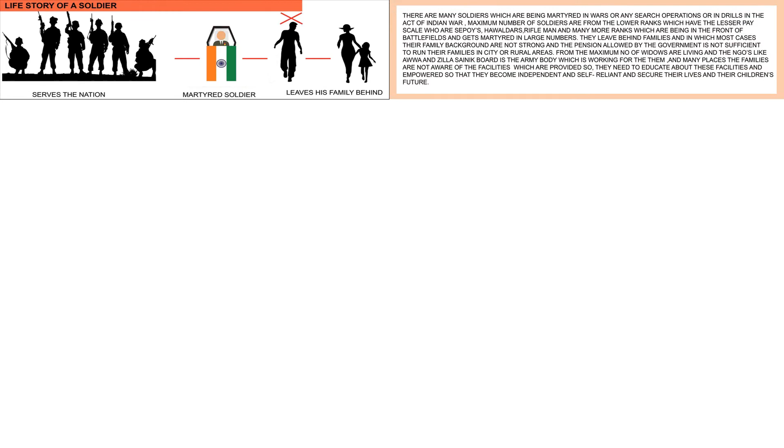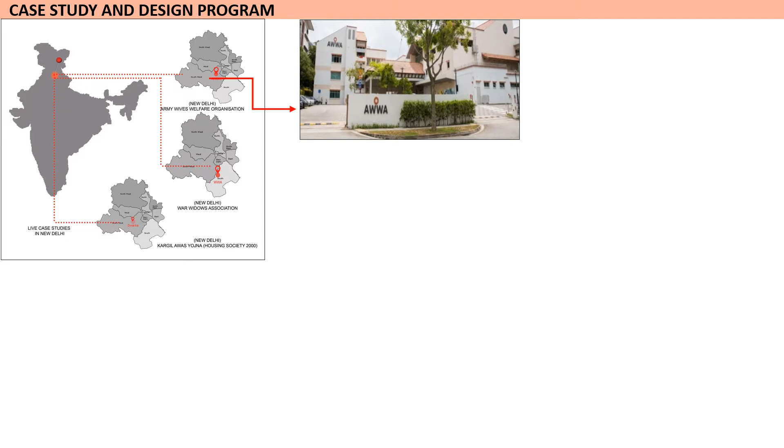The case studies are done in New Delhi. Case study 1: Army Wives Welfare Association, War Widows Association, and the Kargil Awas Yojana Housing Society. While doing the NGO case studies, I came to know about the opportunities they provide to the Veer Naris, but they basically reach only those Veer Naris who are educated, aware of these facilities, and those who have shifted to the cities. They focus less on widows in remote areas, though they keep track of those widows with the help of the Zilla Sainik Board, but provide less help.

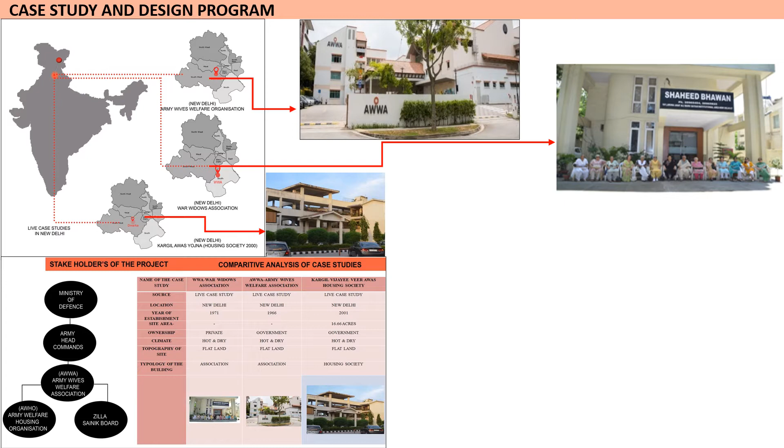With this understanding, I realized that with the help of NGOs, I can propose the necessary facilities within a gated campus that will be easily accessible to Veer Naris from nearby states also.

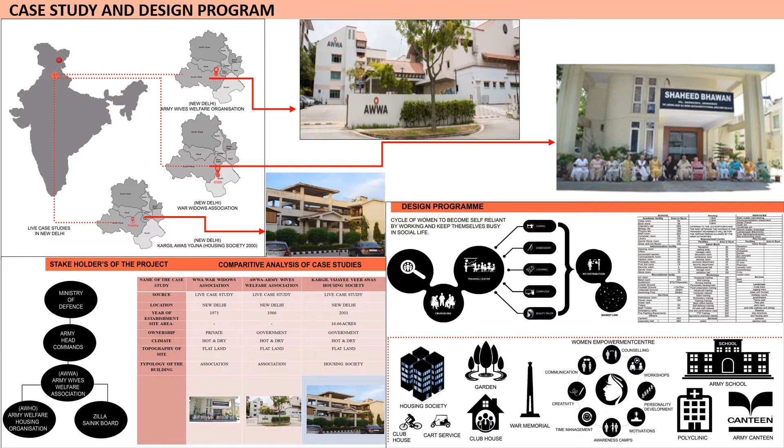The design program includes an Empowerment Center with skill-based training classes for job opportunities to help Veer Naris become self-reliant. A Housing Society, where houses are allotted according to the rank of the soldier. Recreational spaces, landscape garden, clubhouse with organic swimming pool, children's play arena. For health facilities, a polyclinic is provided, along with a school facility for their children, an army canteen for groceries, and a daily market for daily needs.

The reason behind choosing the site in North India is that the borders are in the northern region. North India has the highest contribution to the military forces, and the ratio of casualties is higher from North India, including the northern region area.

This is the proposed site by the Sainik Welfare Organization. The site lies in the city of Gaya, Bihar, located near the army cantonment locality. The site area is 39.71 acres.

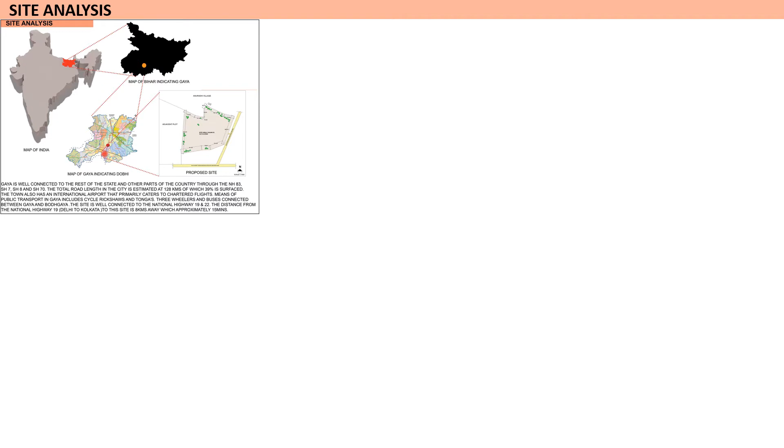Gaya is the city at the center of Bihar state. It is very well connected with Uttar Pradesh, Sikkim, Nepal, West Bengal and other states too. The project also demands a huge expanse of open space, away from city noise and pollution. The town has a tropical hot climate with hot summers and cool winters.

Site surroundings: the site is very well connected with Gaya city, the nearby airport, railway station, bus stand, bazaars, army area, etc. All these facilities are available within the range of 10 to 15 kilometers.

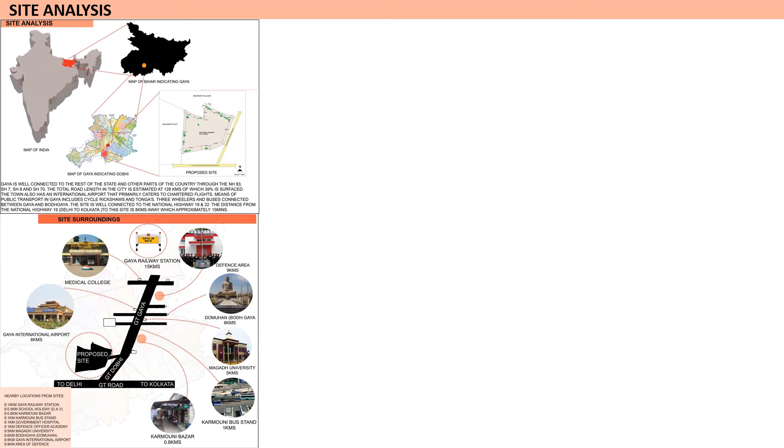The site shows the images, some climate study. The topography of the site is flat land, and the site diagrams show the site area, road hierarchy, site vegetation, site connectivity, built-unbuilt ratio, and the site climate.

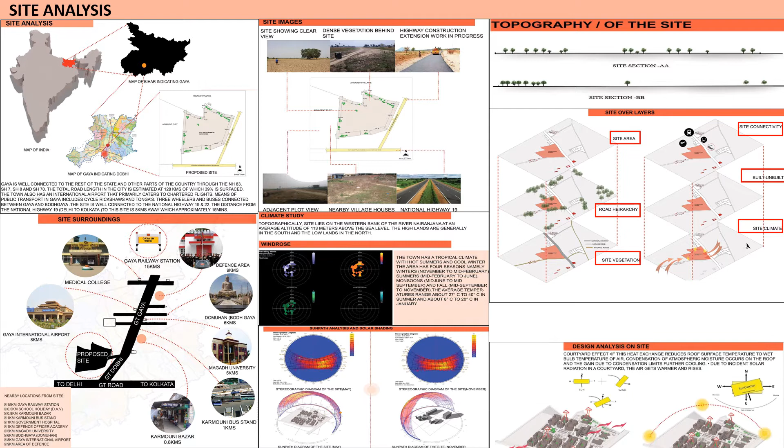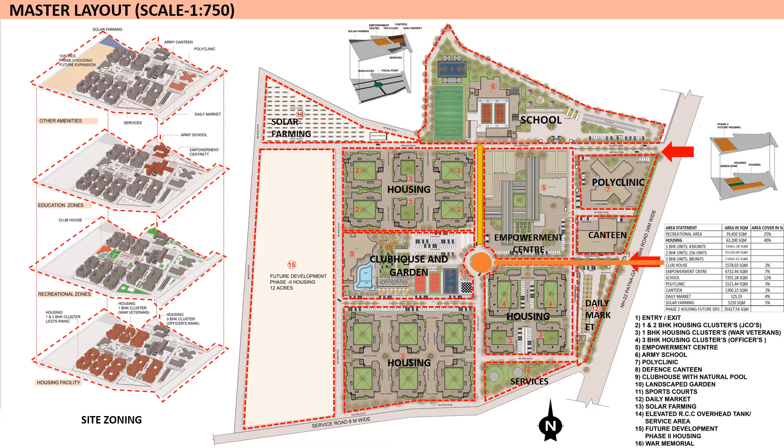Towards the north, the path leads to the army school; towards the south, the housing society; towards west, landscape gardens; and towards east, a 3 BHK housing, polyclinic, and canteen. All these paths are connected with peripheral roads.

This is the NH22 highway, these are the peripheral roads, and these are the service roads connected to the highway.

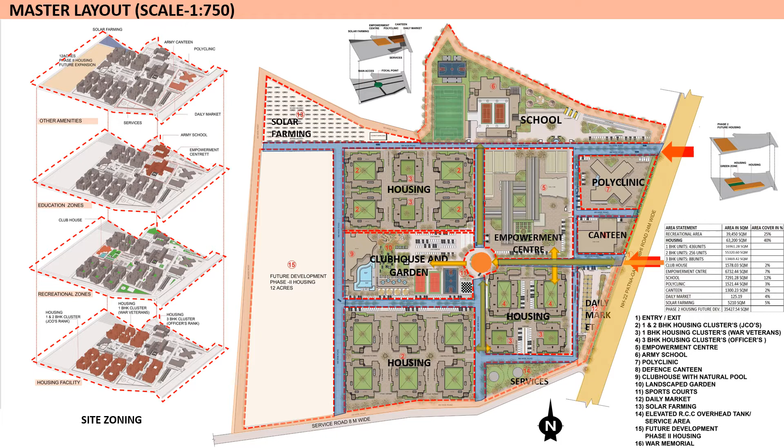The war memorial is provided at the common gathering space to remember the soldiers' sacrifice and give them Shraddhanjali. The concept elaborates on Dharmachakra, the wheel of duty, law, and righteousness. The proposed wheel aims to draw a grateful nation to reflect on the magnitude and timelessness of the ultimate sacrifice made by India's military martyrs.

The war memorial is based on five circles. The Circle of Rakshak Chakra: teak trees represent the soldiers who ensure territorial integrity of the country. The Circle of Yudh Path gives ceremonial access to the memorial from all four directions.

The Circle of Tyag Chakra: pillars symbolize the ancient war formation, Chakravyuh, with names of martyrs etched into them. The Circle of Veerta Chakra: the statue of the soldiers makes visitors feel protected from problems.

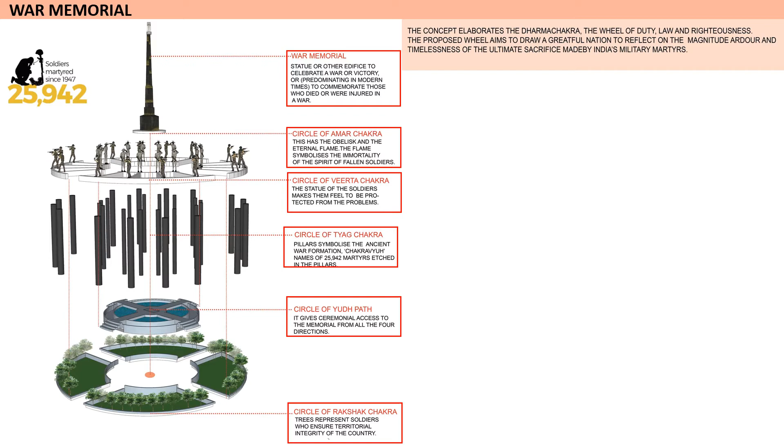The Circle of Amar Chakra has the central eternal flame, which symbolizes the immortality of the spirit of the fallen soldiers. The war memorial is a statue or edifice to celebrate a war victory.

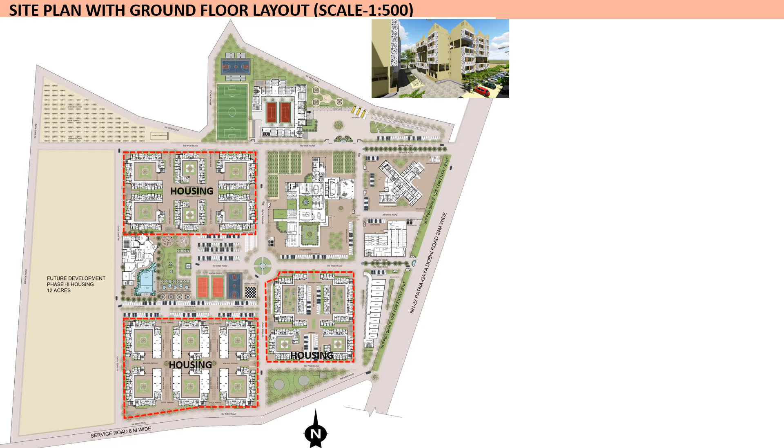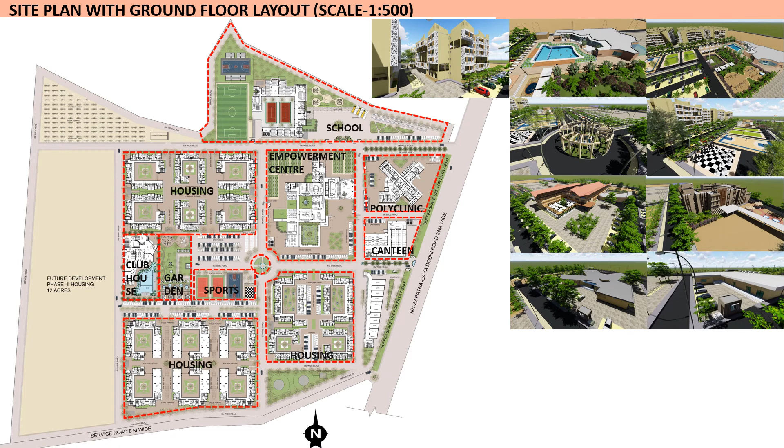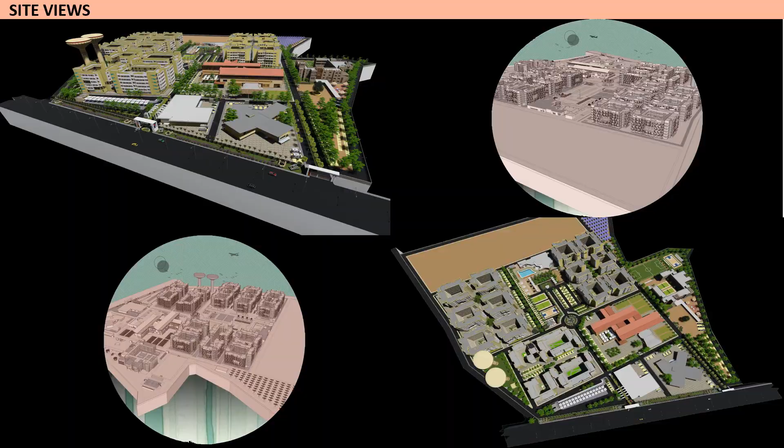The building is oriented in the north-south direction. The entrance faces west because it is easily accessible from the roadside and also provides shade from the southern heat. The admin office with the president's office are provided on the ground floor for easy access.

Skill-based training program classes are provided on both the ground floor as well as the first floor. The canteen facility is on the ground floor with an open canteen seating area under the tree, and the ulta chhata is used for shading.

The walkway towards the canteen passes under the pergola. These spaces create an ambience in the structure.

The courtyard is placed centrally to maintain the microclimate inside the structure. It helps maintain the circulation flow of light and ventilation in the structure.

Small green pockets are created beside the structure and at the periphery for flower beds and to keep the surroundings green and lush. Vegetable farming is also provided for agriculture training, and the products can be used in the daily markets.

The waste from the vegetables can be used as manure in the gardening or farming itself. Parking for staff members is available, and cycle parking for the Veer Naris along with a cart service are provided for outsiders and for movement within the campus.

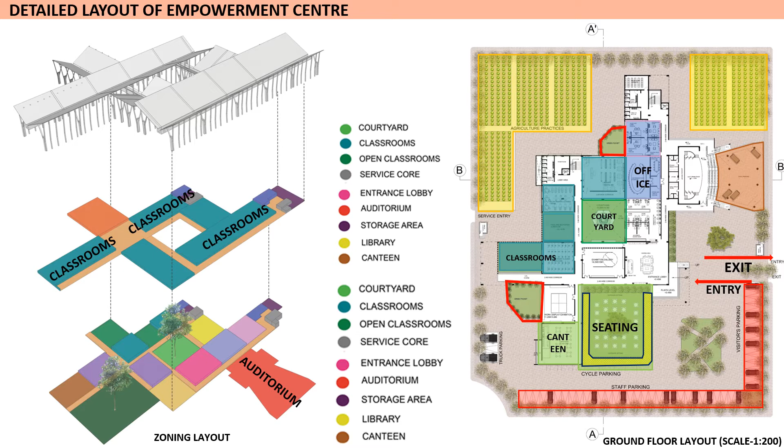The material used in the structure includes fly ash bricks for the walls, with concrete columns as the support system. Timber is used in the roofing systems and the facades of the structure.

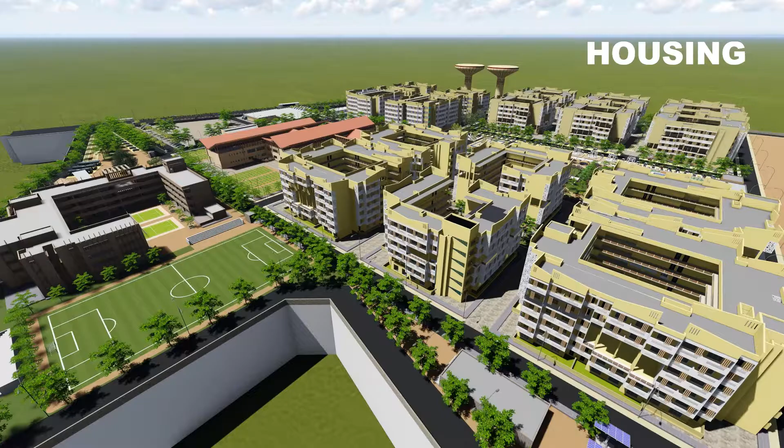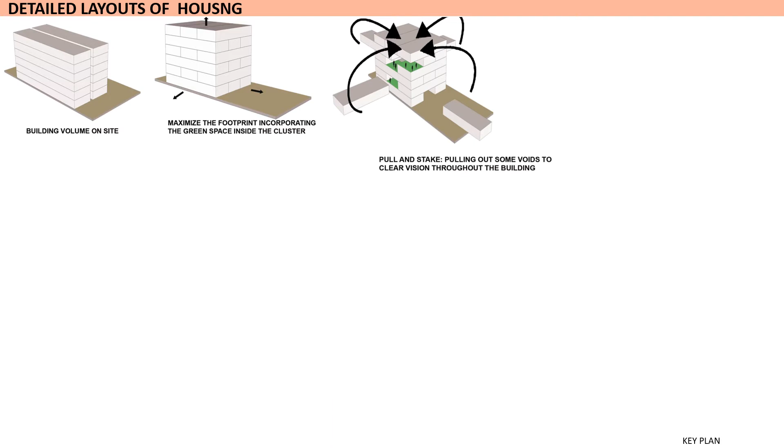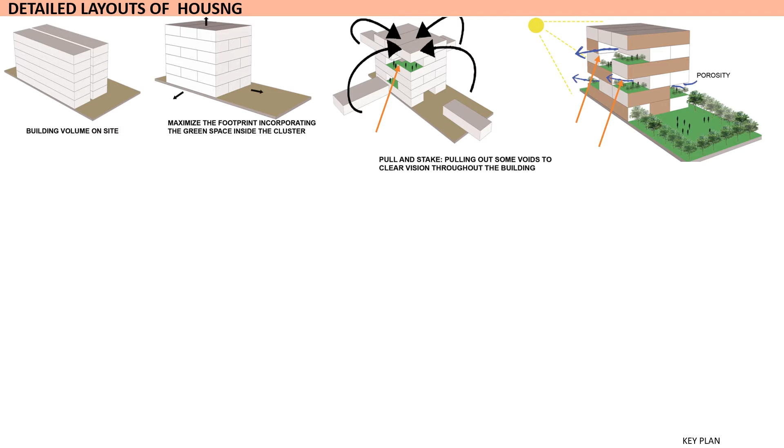The solid and void masses play an important role in the housing. In every floor there is a void created by removing a unit, which becomes a common gathering space for that floor. With different height levels, some are double height voids and some are single. These voids create visual connectivity to each building and maintain social interaction.

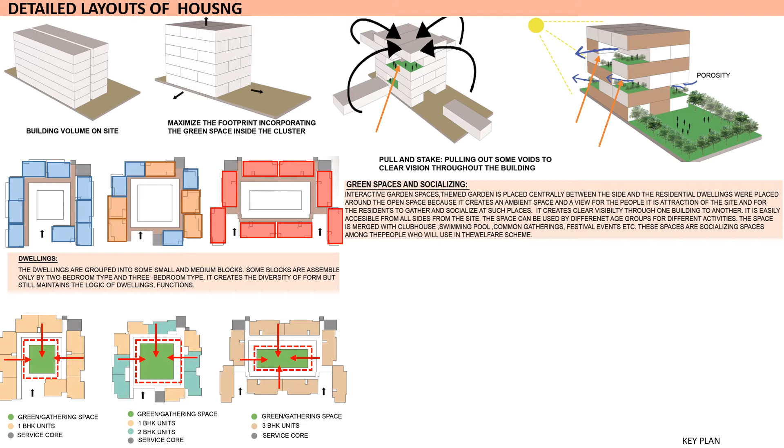The dwellings are grouped in small and medium blocks. Some blocks are arranged by one bedroom and two bedroom clusters, and there is a three bedroom cluster for officer ranks. Inward focused design promotes safety, social interaction, and visual connection.

Focusing a project inward can help residents interact and communicate with one another. Amenity space is located in the center of the project rather than on a busy corner. To draw people into the center of the community, a vibrant piazza was designed with lush landscaping, seating, and lighting. The piazza creates a tranquil transition between public and private space while giving the community a signature statement and a unique sense of arrival.

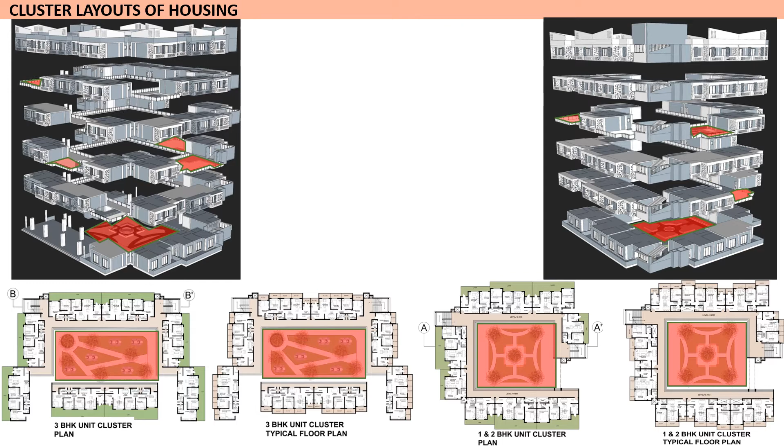The idea is to create housing of scale to promote a healthy lifestyle, but the concept of focusing inward can be extended to individual lots and homes as well. The traditional backyard with a neighbor on each side and the back is being accomplished through the use of courtyards and landscape elements. This is a low-cost construction housing using locally available bricks in the state, made of fly ash. It is lighter in weight and controls some amount of heat.

Detailed layout of dwelling units. A 1 BHK unit which is 700 square feet. A 2 BHK unit which is 904 square feet. A 3 BHK unit which is 1200 square feet.

Detailed cluster arrangements with site. A 1 BHK cluster is for war veterans. A mix of 1 and 2 BHK clusters is for junior commissioned officers.

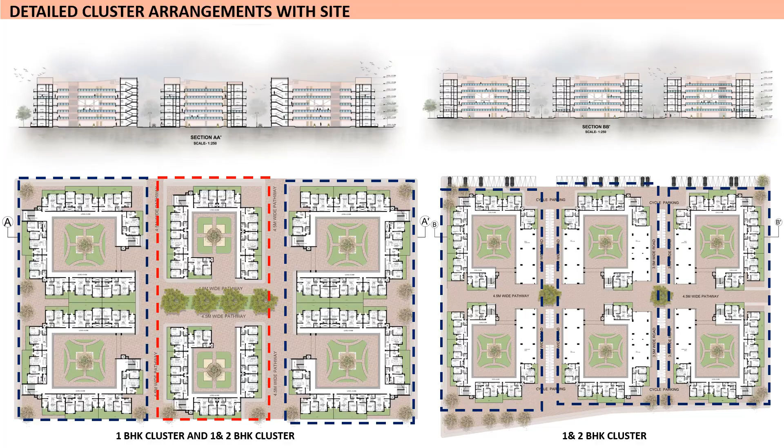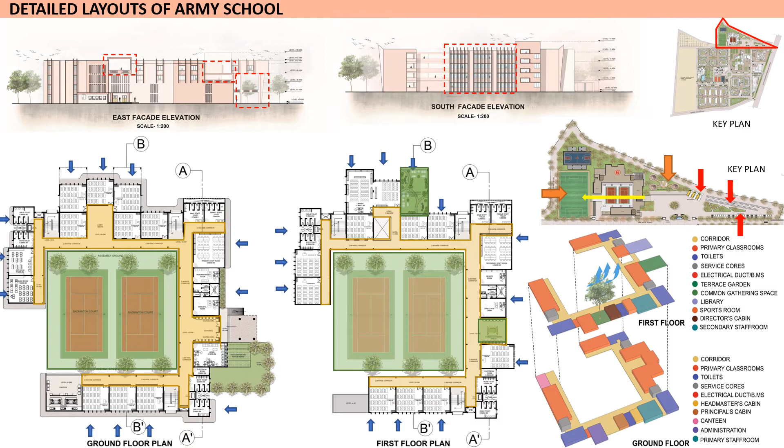To minimize the heat, sun cutters are used and provide a profile structure. It also works as the aesthetics of the building. The highlighted blue color shows the classrooms, and the red one shows the service zone, which are toilets.

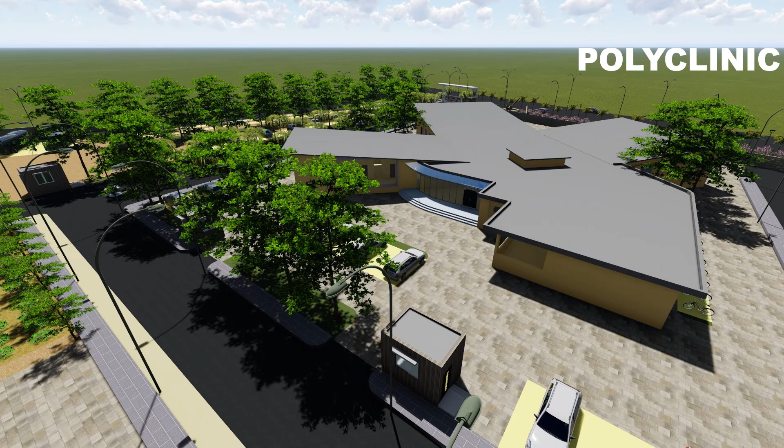The building is oriented east-west, facing towards the roadside, which can be easily accessible. The structure is a combination of four blocks: consultancy blocks, which include different consultation doctors; diagnostic blocks for reports and tests; general services for staff sessions and staff members; and emergency blocks for wards and patients.

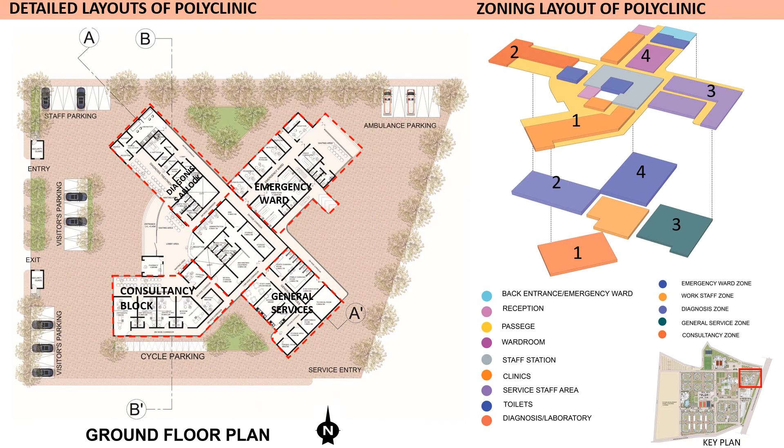Large openings are created in the lobby areas for clear vision and connectivity to the outside structure. The glass facade is used at the entrance. Inward sloping roofs are used to avoid making gutters, and the rainwater can run off through the duct. The roofs also play a major role in achieving different built forms in the structure.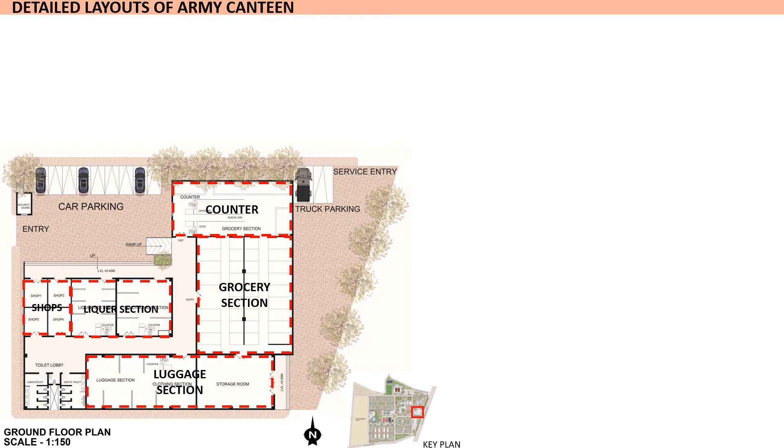Architectural representation and detailing.

Scope of the work is divided into three parts: services, construction and sustainability. Concept of having an organic swimming pool. Natural pools are eco-friendly and need less maintenance. A natural pool is often designed to imitate pools, ponds and other bodies of water in the wild. They can have irregular shapes along with rocks, waterfalls and boulders.

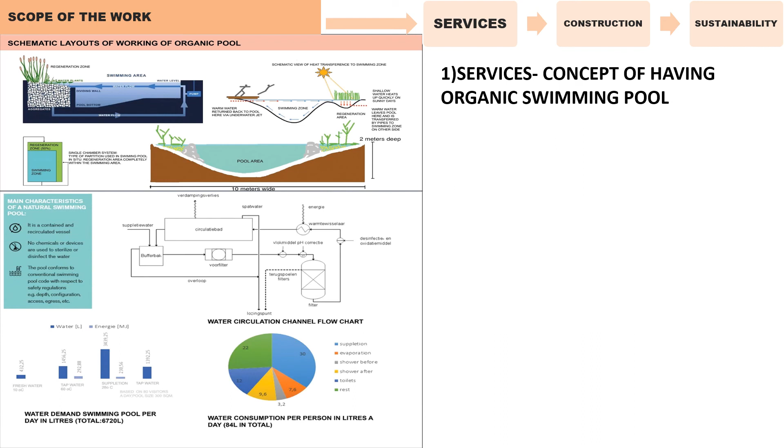Not every pool built to look like a natural body of water with realistic rocks and boulders is a natural pool. A swim in a natural pool does not leave you with itchy red eyes, dry skin, or wanting a shower, which is common after swimming in chlorinated water. The function of a natural swimming pool or pond is to be filtered organically rather than by chemicals.

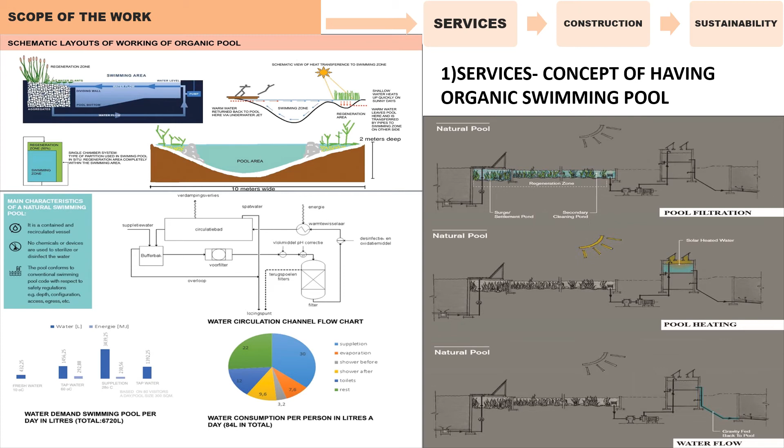Another pool called the regeneration zone is built in the surrounding, where the water enters either a gravel filter or a constructed wetland made of plants that clean the water. It is a sustainable method of making an organic pool without chemicals.

The plan shows the 300 square meter area of the pool, which contains 7,80,000 liters of water. The pool is divided into two parts, children's and adults, and the surrounding 250 square meter area is the regeneration pool to clean the main pool, which contains 5,40,000 liters of water.

50% of the pool area is required as a regeneration pool, which cleans the water with the help of water plants and submersible motors, clearly shown in this section. This is the view of our organic pool showing the basic components the swimming pool needs.

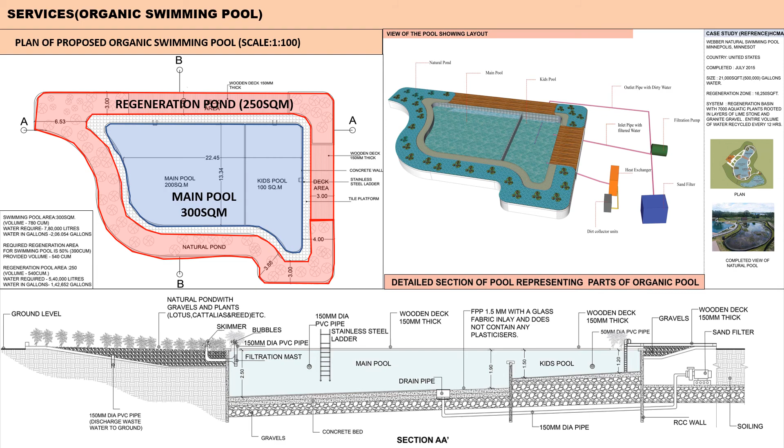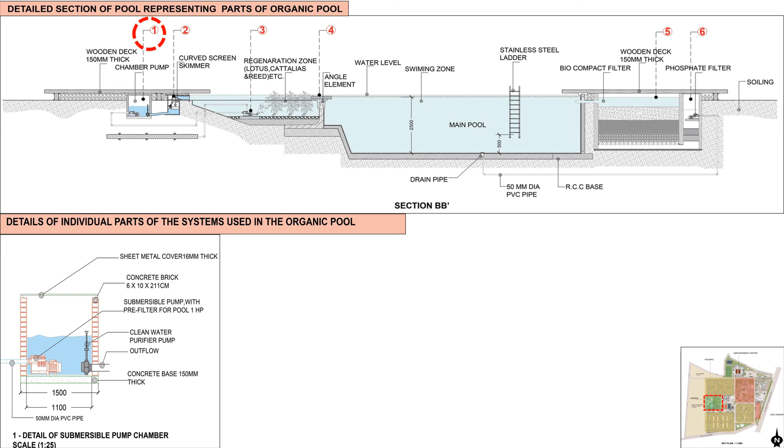Section of the organic pool showing different component element details. Detail 1 is the submersible pump chamber. Detail 2 is the curved screen skimmer. Detail 3 is the regeneration zone.

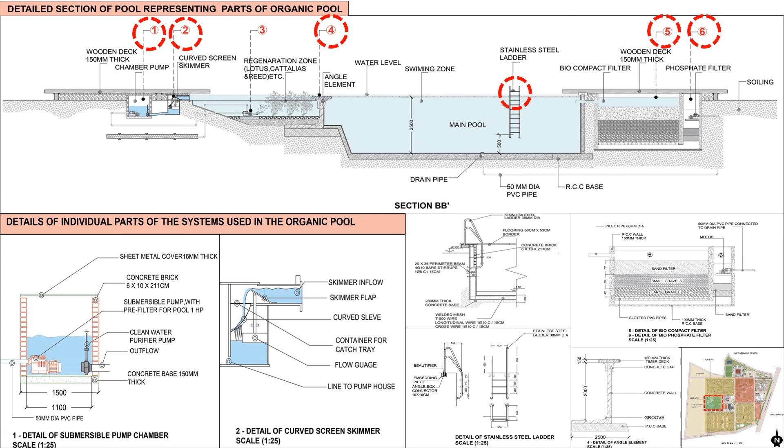Detail 4 is the angle element used in the regeneration pool to clean the water. Detail 5 is a compact filter and detail 6 is a biophosphate filter.

The construction technology used for the empowerment center is a butterfly roof. A butterfly roof is a form of roof characterized by an inversion of the standard roof form, with two roof surfaces sloping down from the opposing edges to a valley near the middle of the roof, and the valley is also the beam support system of the roof.

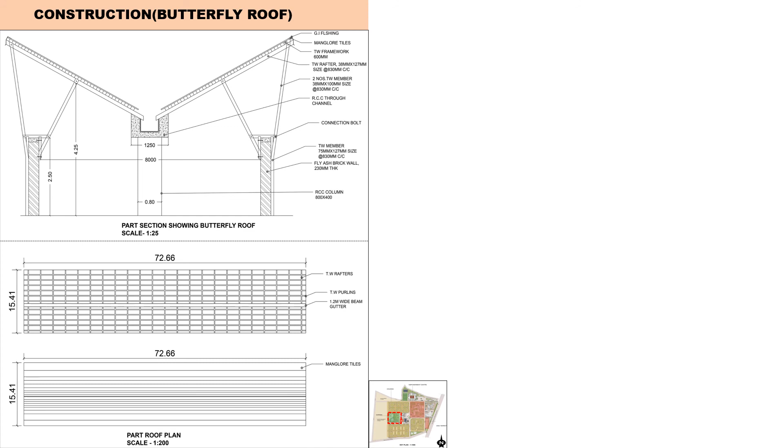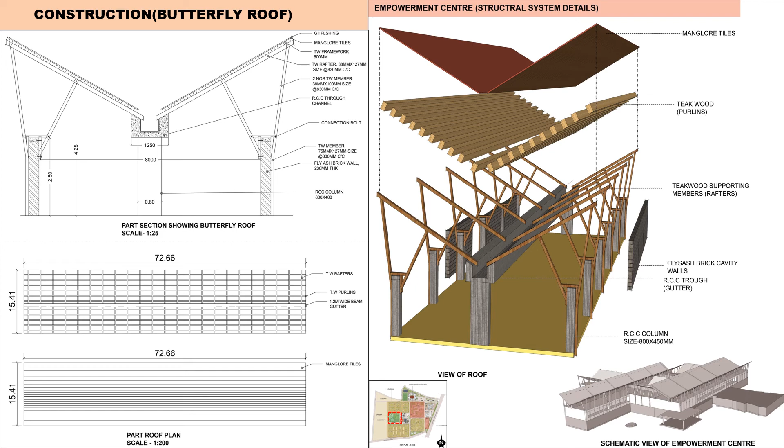It is used in the empowerment center structure because the butterfly roof also makes a unique interior space and provides column-free spaces, and also removes the need for gutters at the edge of the structures.

A strip section through the wall and the roof. Detail one is the footing, a mid-level detail, an inversion roof detail, and a beam detail.

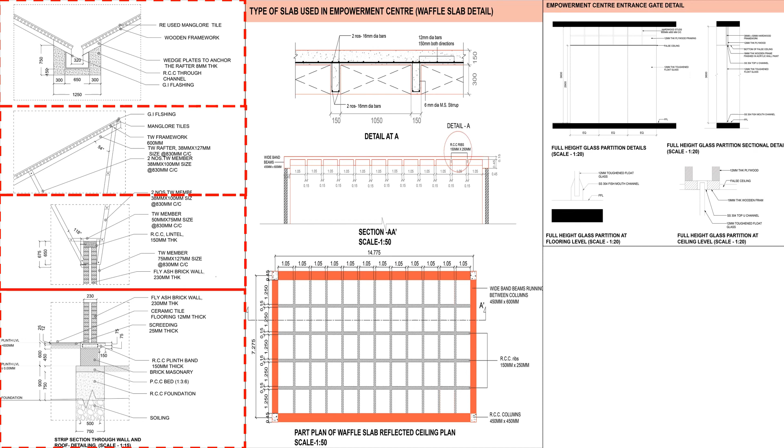The type of slab used in the empowerment center is a waffle slab. This is the entrance gate detail of the empowerment center and the column grid layout of the empowerment center.

A sustainable aspect, the Ulta Chhata, is used for rainwater harvesting. It is a device named for how it looks like during monsoons. The Ulta Chhata or concave canopy captures the rainwater which then trickles down to reach a filter and goes to underground storage, which can be reused in gardening or released to the ground.

The canopy is a self-standing device which can be easily fixed or removed. The canopy stand contains a charging slot which works with solar panel energy fixed at the top of the canopy. Depending on the size and location, a single unit of Ulta Chhata can harvest up to 1 lakh liters of rainwater annually.

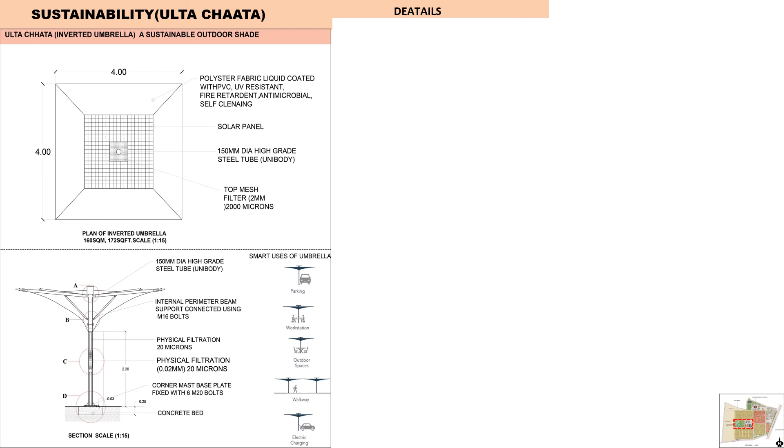This canopy can be used as car parking sheds, landscape gardens, walkways, outdoors, etc. The Ulta Chhata is a device which solves power and water scarcity problems in one stroke.

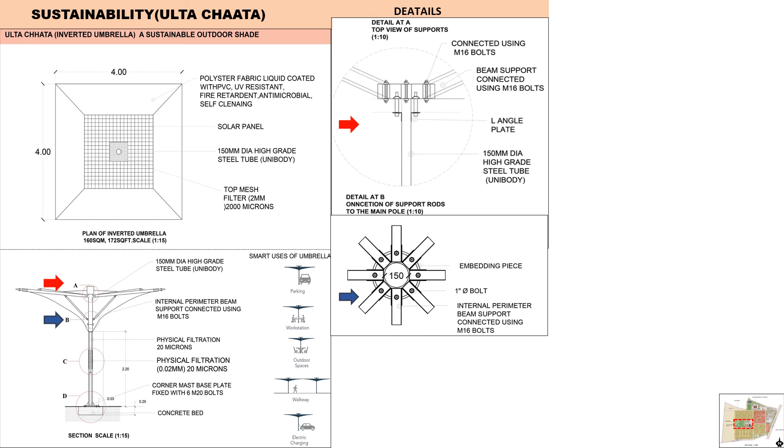Detail A shows the connection of supports and rods to the main pole. Detail B shows the embedded piece of the Ulta Chhata. Detail C shows the dock station of the charging point.

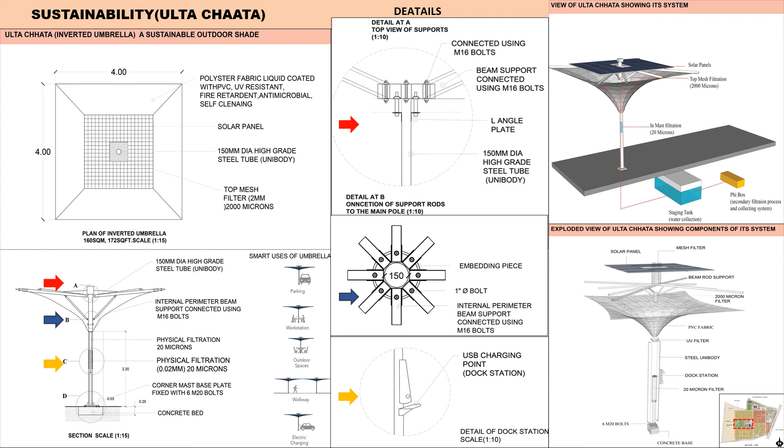A view of the Ulta Chhata showing the system of collecting the rainwater. An exploded view of the Ulta Chhata showing the components of its system. Thank you.